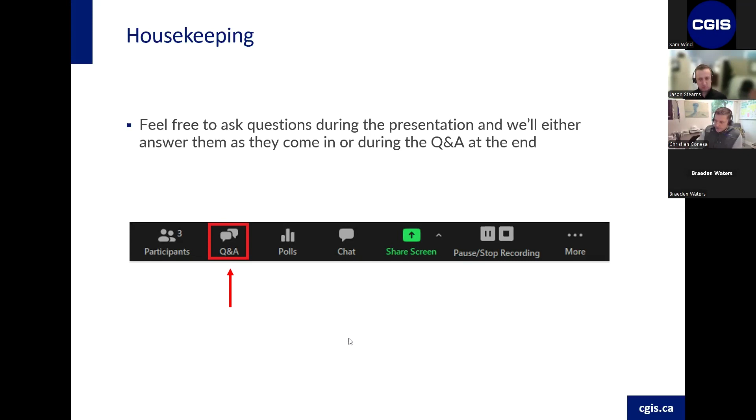The topic of conversation today, from our perspective, as Jason alluded to, is applying lessons from aerospace applications. In this case, we're going to tilt it towards hydrogen, but there are some lessons we've learned dealing with what are ultimately extremely difficult applications in the aerospace industry, bringing those same lessons learned into industry at large, particularly relevant now that hydrogen is so prevalent and growing.

Just a short bit about Trimteck. We're 20 years old, as Jason mentioned, around since 2004. We're a privately held manufacturer of control valves, specifically in the special service and severe service space. We're a bit of a throwback as an organization. Most of what we do involves an intense sizing and specification process around a specific set of process conditions, and the valve is a solution as a result of that.

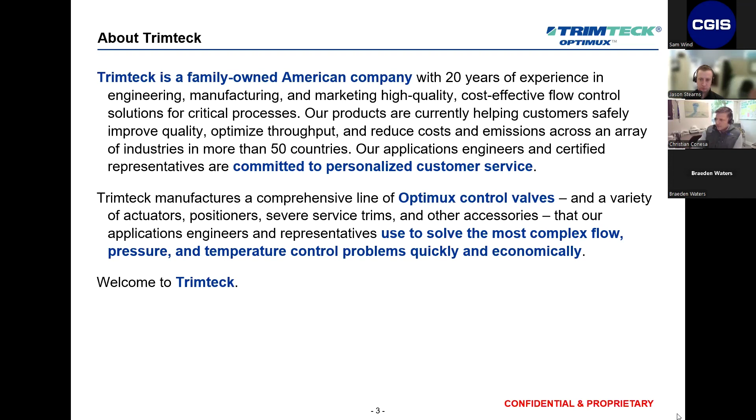All right, so a little lag here. Quickly again, in the value proposition, we pride ourselves on products of extraordinarily high quality. The company really cut its teeth on government contracting in the defense and aerospace sector in the United States, building valves that were unique for ground testing systems at NASA's Stennis Space Center in Mississippi. That quality process that was baked into the organization at that point in time now carries through for every valve we manufacture. Very quick deliveries, also a point of pride for us. We have a very efficient and quick manufacturing process. Responsiveness to the customer and application support, those are two things that go hand in hand. The valves are manufactured in the United States, and they're cost effective for what they are.

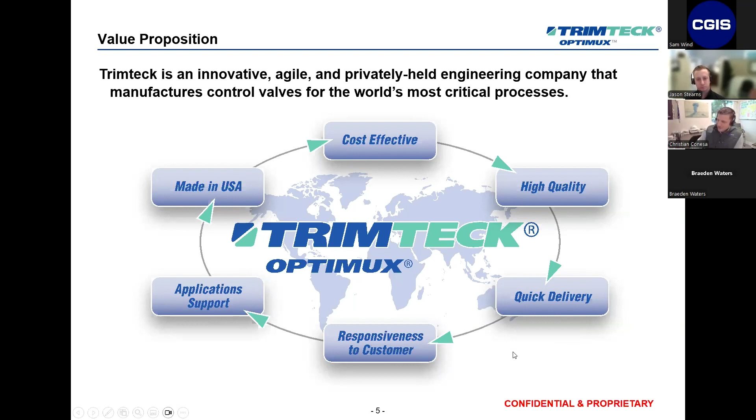Some of our customers, I think, that are most relevant here to this presentation. NASA is really our cornerstone customer, almost our original customer for custom engineered valves. Subsequently, as a result of the private aerospace boom in the United States, we've been fortunate enough to have customers like Blue Origin, SpaceX, Relativity Space, the Air Force, et cetera. But also other non-aerospace customers that are relevant in some way, some of them in the power industry. So we do a lot of work with NextEra Energy, which is the second largest utility in North America, and then the industrial gas manufacturers, Air Products, Air Liquide, Linde, et cetera.

The presentation breaks out into three different sections. The first is, what do we mean by aerospace industry valves? I want to disambiguate what we do versus what companies that make some of these space-bound solenoid valves do. Secondly, we're going to talk about how we engineer those solutions and what lessons we've learned from working in that field.

Then third, we'll go over some of our general service product line or more standard product line and point out some of the design differentiation that we've built into the product, specific to hydrogen in this case, that we have and really are unique in that sense in terms of the market landscape.

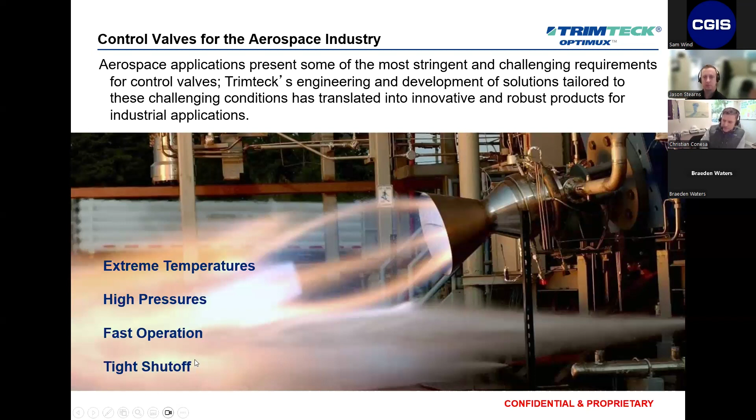Very briefly, I want to show this video. Hopefully it'll play. It doesn't... let's see... okay. Well, that's our first little technical glitch.

This is a Blue Origin test site. So this is what these sites look like—typically out in the middle of nowhere, either in the desert or in the swamp. These structures essentially mimic the throttling of the oxidant and the fuel into the rocket engine, and that has to be done very precisely in order to capture the testing data they're trying to capture from the engine. So that's what I mean when we're talking about ground testing of rocket engines.

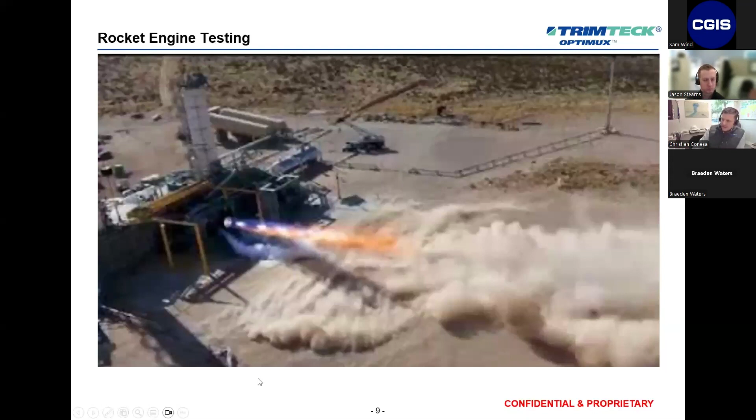One of the things that we really emphasize is that any kind of conversation around control valves—this isn't an introductory presentation on control valves—really has to be specific to the industry we're speaking to, because you guys have different names and a different vocabulary for the applications that you tackle than a different vertical market would.

In oil and gas, you have a certain set of common control valve applications—refining, chemical, petrochemical, and so on. We're talking specifically today about aerospace, which, as I said, means high pressure, low pressure, liquid and gaseous oxygen, hydrogen, vacuum jacketed valves, etc.

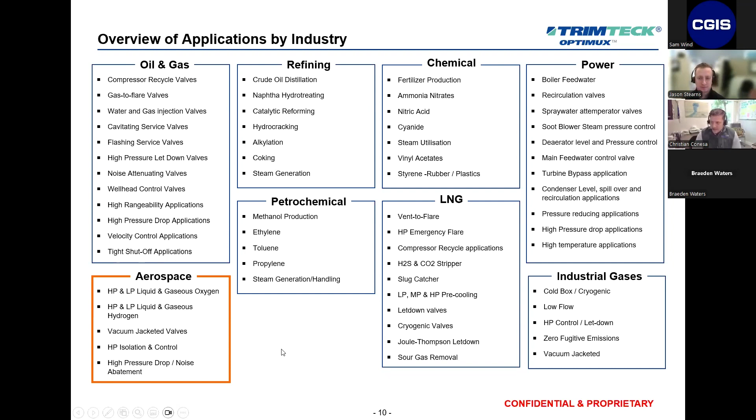The way in which valves are classified—valve purists, and I think CGIS is certainly part of this cohort—people who know valves well understand that there are three categories that have been established over the course of the last 80 years, and reviewed periodically.

When you classify valves according to service, we talk about general service valves being in the lower ANSI class ratings of 150 to 600 class, and moderate temperatures between -50 and 650 degrees F. You want non-corrosive fluids, minimal pressure drops, no cavitation or flashing present. Typically, velocities are low enough in a general service application that noise is not an issue either. Standard materials of construction—carbon or stainless steel bodies—these are your commonplace valves that are interchangeable and common to a wide variety of applications.

Special service is an interesting sort of in-between bucket, and we designate special service valves as valves that have higher pressures, so above that 600 class, demanding temperatures either higher than 650 or lower than -50, corrosive or erosive media challenges, and pressure drops that start to become significant—so more than half of P1 typically.

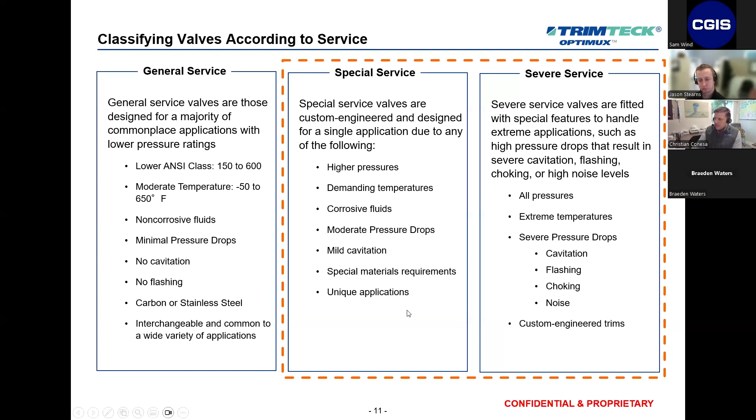When we talk about this, it's the sort of original valve I'm referring to with respect to aerospace testing systems or rocket testing systems that we've built thousands of over the years, but started off with a handful in the late aughts. NASA's issue was they had test stands in the middle of the swamp in Mississippi, that had been there essentially since the Saturn V days - since the space race in the 60s - and been built, I wouldn't say haphazardly, but very quickly, oftentimes using home built or non-standard valving and equipment.

They came to us in 2007-ish with the question of whether we could replace some existing valves they had in there, and they had very awkward face-to-face dimensions. They were built specifically for these stands, and we took opportunity with those orders to study the valves, to improve upon them as much as we could, and we did - in so much as one of their main problems was repeatability.

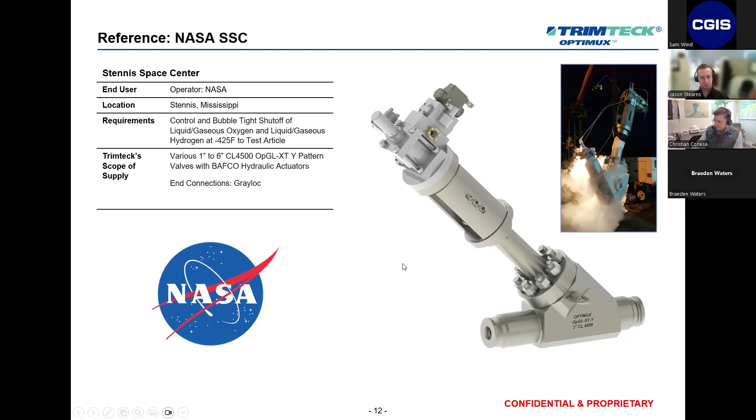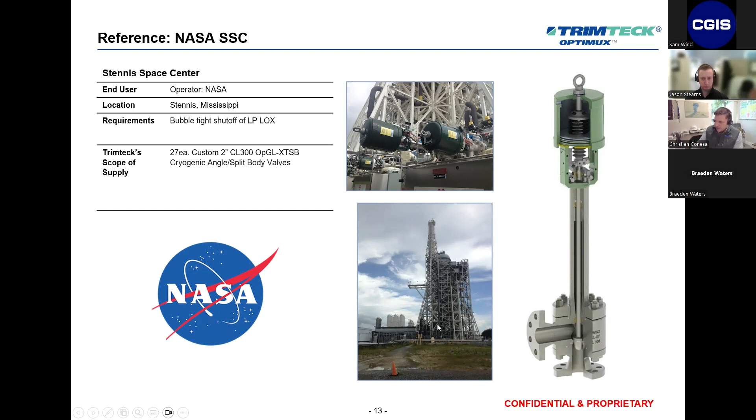It's another example of some liquid oxygen valves on those test stands at Stennis Space Center, and this one is particularly interesting as well. You'll notice this valve is coming out of a cryogenic bath, essentially, during cryogenic testing.

I want to mention something that was a valuable lesson for us during the development of all these different one-off custom valves, and that is the testing requirements. Hydrogen is a notoriously small and slippery molecule, and the test that NASA has devised over the years, in true bureaucratic fashion, they kind of layer - anytime there's an issue, over the course of the last 50 years or however long they've been doing this, instead of getting to root causes, they just add a layer of testing and add a layer of testing. So the test is called the GTO8 test, and it's a bear of a test.

It's very difficult. What you do is dip the valve in a cryogenic bath, ensure it gets down to the required temperature, and then leak test it with gaseous helium at maximum allowable working pressure. The other end comes out to a beaker, and it's a literal bubble test, like you'd have on a standard rubber-seated butterfly valve, but at wild pressures and temperatures—we're talking about 15,000 psi oftentimes. It's got to be truly bubble tight, zero bubbles. That's an extraordinarily difficult test to pass.

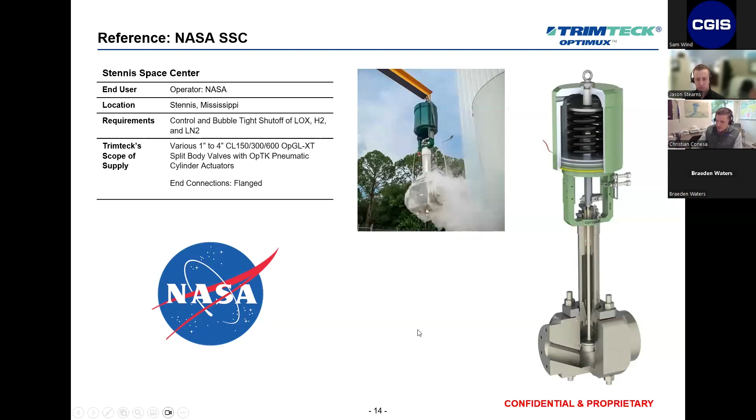Which would contract oftentimes also at a different rate and leave some additional tolerance if it wasn't just right. So, it's a long way to get to your answer, but this is a PCTFE, a KELF soft seat insert here, because for cryogenic purposes, that's the right choice. Let me rip through a couple more of these quickly.

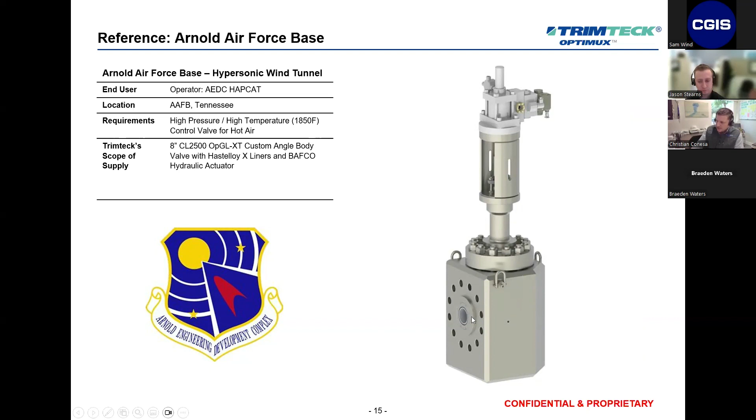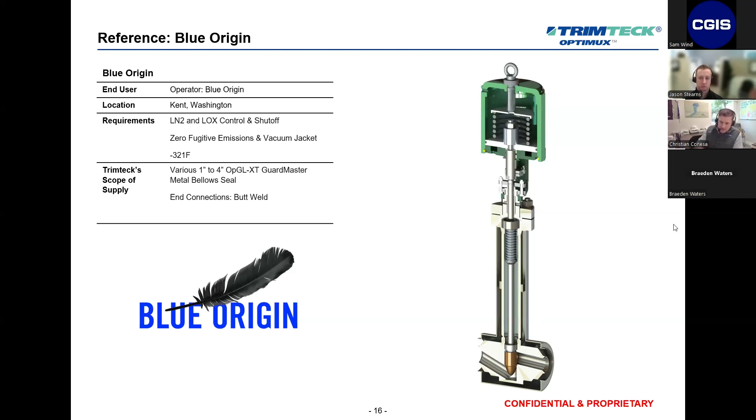Sniff ports here for the metal bellows are super important, whether it's hydrogen or anything else. When you have a metal bellows seal, you want to be able to identify if there's been any breakage or leakage through there. The actuator we'll touch on a little bit later, but the piston cylinder pneumatic actuator or some of the hydraulic actuators you've seen in previous photographs are definitely helpful when it comes to performance of the valve, whether it's the precision in its stroke or the thrust necessary to generate that class 6 shutoff.

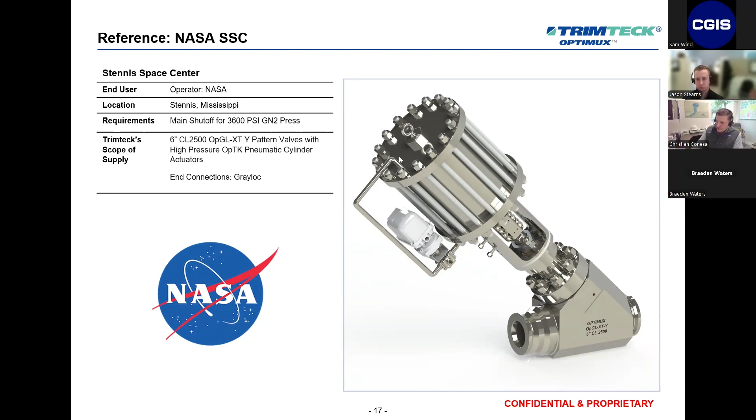So what are some lessons learned and solutions developed as a result of this? First of all, hydrogen's a different animal - let's start there. Trimteck as an organization is very accustomed to dealing with, frankly, weird applications, stuff that's not necessarily in the mainstream of control valve applications. So we found that the muscle we've developed internally around design and engineering, the way that we trace materials, the way that we can simulate applications, bodes very well for the private sector.

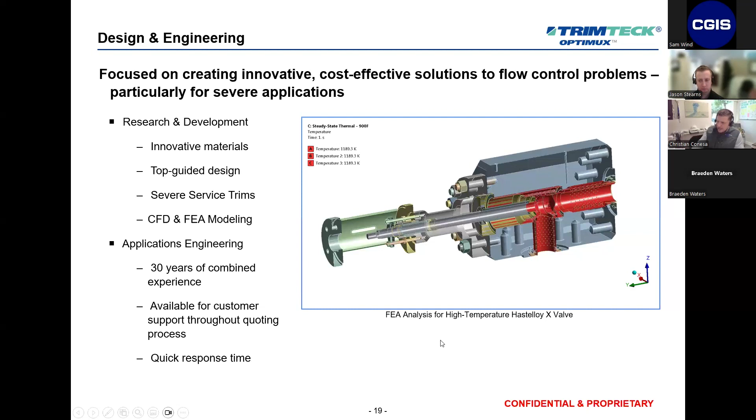We routinely rely on CFD and FEA modeling because a lot of what we do is just one-off work. This is that aperture valve that we showed you up top, and we ran all sorts of simulations for the Air Force. We ran lots of different iterations in terms of design, and also iterations in terms of process conditions, virtually, before we turned a single turn on a CNC machine. This allows us the ability to test before we build - you can see different temperatures here.

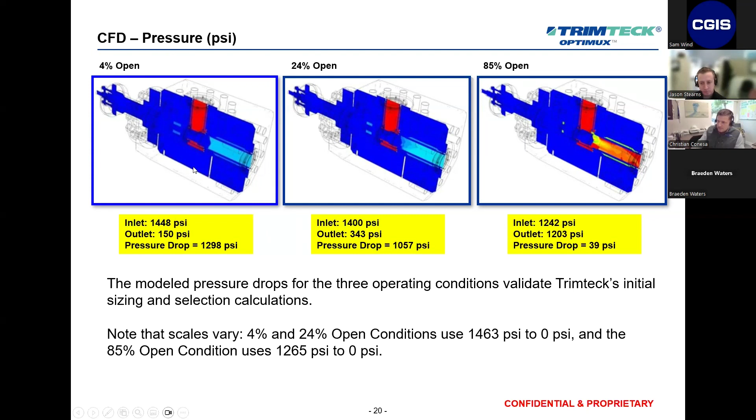Valve velocities become very important, particularly in oxygen and hydrogen applications, understanding what the actual exit velocity, or valve velocity and pipe velocity just downstream are, because these are molecules that don't like to see turbulence and impingement. So you want to make sure velocities are kept to a minimum. This is hot air, so it's not as important, but you get the idea in terms of the visualization.

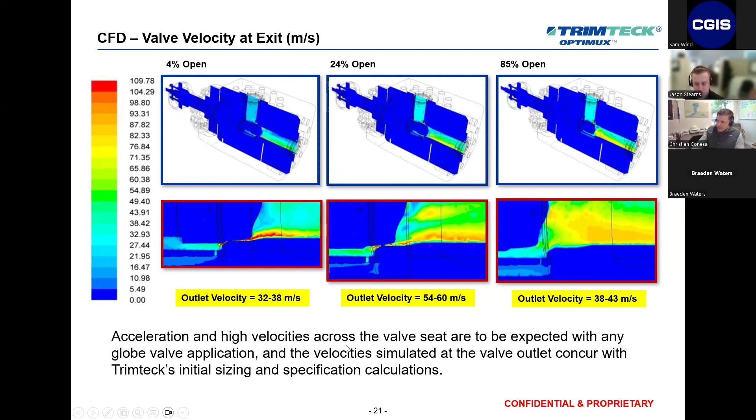And then temperatures, those temperature swings are really important. This is gas flow. So this is the CFD.

The FEA, the finite element analysis, is actually more interesting in a valve like this, because that really allows us to understand where our tolerances need to be at any given point to maintain either shutoff or integrity of the packing arrangement, guiding systems, etc., to ensure that the valve is seating in the exact same spot every single time it strokes, regardless of the temperature.

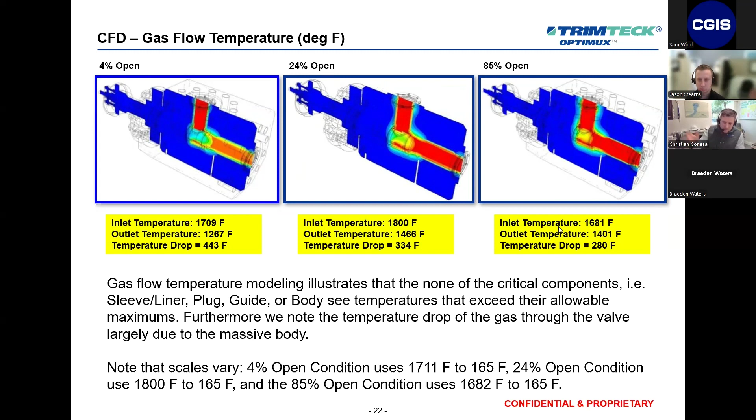This is briefly our applications and design engineering process. We tend to receive process conditions and delivery requirements from a customer. We run it through a sizing and specification exercise. We have a very robust software that we use to size and specify valves.

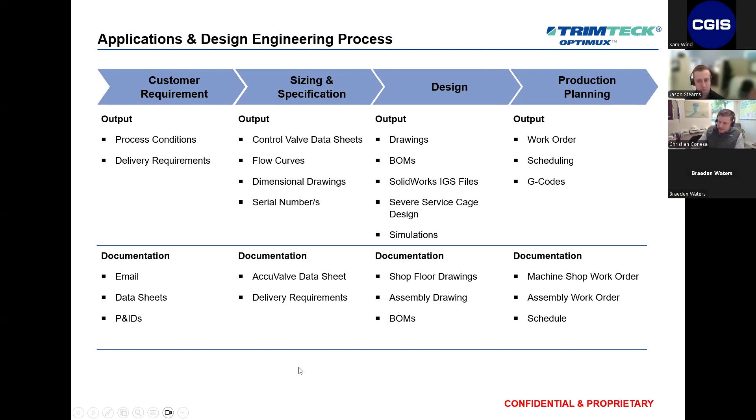If an order comes in, it goes through a design process in SolidWorks, and then in ANSYS if it needs to be simulated. That gets blown out to shop floor drawings and BOMs, and then manufactured right here in Coral Springs. Our supply chain - castings are the only things we don't do here in-house.

We don't have a foundry in-house. We source castings all over the world. Most of the valves that I've shown you here are actually not cast bodies at all, but rather they're fabricated bodies, usually from U.S. bar stock - so North American bar stock. Machining, assembly, testing, all with its subsequent documentation.

The reason I want to show this slide is because that same NASA kind of documentation and QC QA requirement applies to everything that we build, whether we build a 150-pound steam valve or a 45, or a 15,000-pound oxygen valve. That traceability is the same for all those valves.

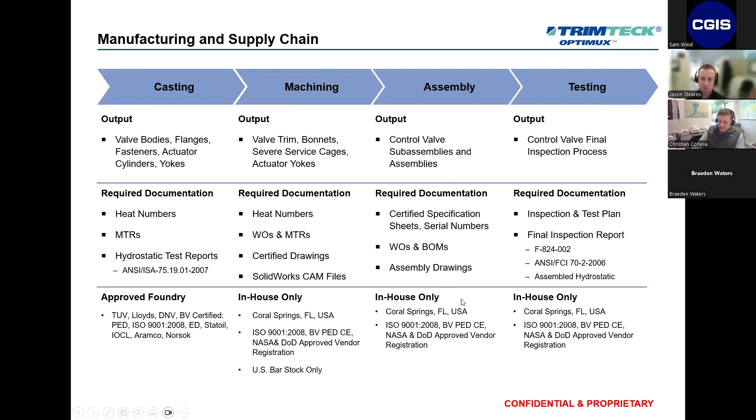All right, so industrial products and applications. I want to be cognizant of time here, Jason, so let me know if I think we're doing decent right now.

This, I think, is a useful cheat sheet that I like to show anytime there's a large group like this. This is just a basic valve style comparison. These happen to be our valves, but this really goes for most any valve manufacturers. What we're doing here is comparing the valve styles based on their ability to handle differential pressures, on their CV size for size, how accurately they control, what's the rangeability or turndown you can achieve with the valve, and how costly they are relative to other valves.

This is a very broad strokes comparison, but I think it's a really useful first pass. I won't go through each one individually, but globe valves - you've only seen globe valves in this presentation because for very difficult applications where you need to introduce exotic alloys, cavitation control trim or noise abatement trim, or you need tight shutoff, the globe control valve is really the pinnacle, and everything else is kind of an iteration of that. They all have their place, they all have their applications, but for what we're talking about, primarily we're talking about globes. I could talk about each of those individually, but we won't do that.

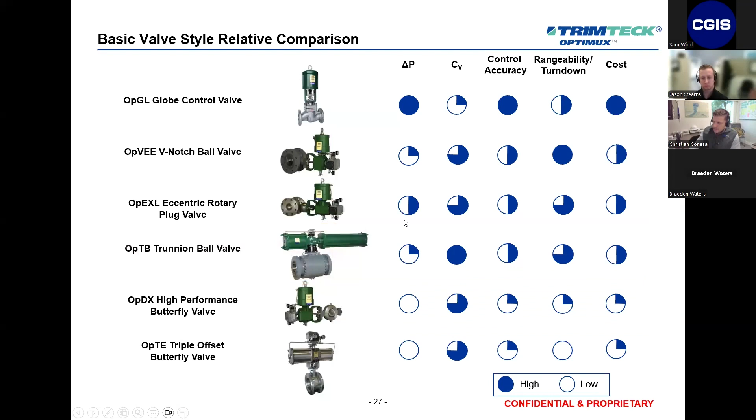Okay, so two industries that very obviously carry over to the private sector from that aerospace expertise are industrial gases, like I mentioned, and LNG.

So the applications that we've tackled in industrial gases go anywhere from the JT valve to cold box applications to low flow, etc. And LNG, similar applications, usually lower pressure classes, but you have some of the traditional sort of gaseous applications, natural gas applications like compressor recycle and anti-surge.

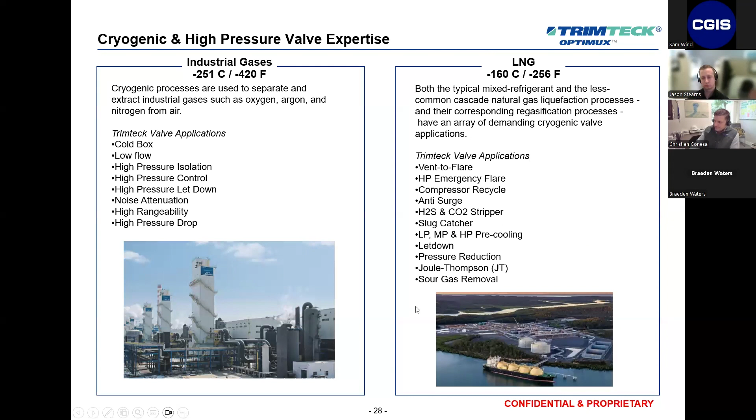The OPGL for us is essentially the flagship product framework around which we work for all of these special and severe service valves.

Right out of the box, this valve has a piston cylinder actuator, which produces extraordinarily high thrust size for size, particularly against diaphragm actuators. That allows us to do a lot of interesting things in the body of the valve, from tight shutoff to being able to characterize the flow with the trim geometry of the plug head, as opposed to the geometry of a cage.

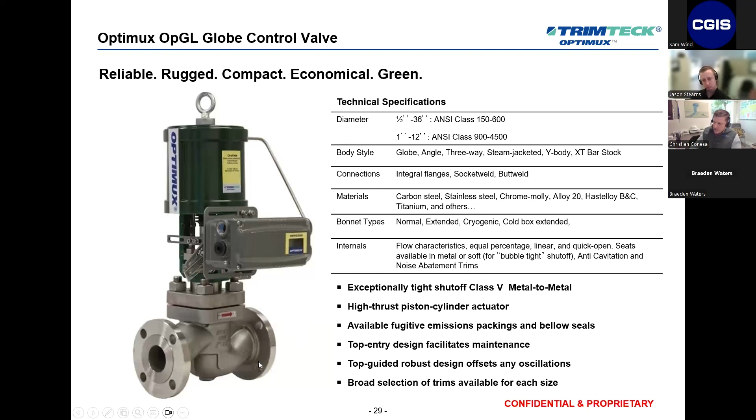We manufacture these in globe style, angle, three-way, etc., with all different sorts of end connections and all different materials.

First and foremost, that piston cylinder actuator, that coffee can actuator that you saw out there, which is our standard pneumatic device, allows you to do a really interesting thing in the body of the valve, which is remove the requirement for balancing in most applications.

The most effective way to control flow is with the geometry between plug head and the seat ring of any valve. As this valve strokes, you get your flow characteristic, whether it's equal percent, linear, quick open, or bilinear.

It allows us to pack the packing box tighter. Because we have additional thrust, we can overcome more friction in the packing box, which gives you better emissions control out of the box.

Again, important for hydrogen as well. Hydrogen specifically, we'll talk here.

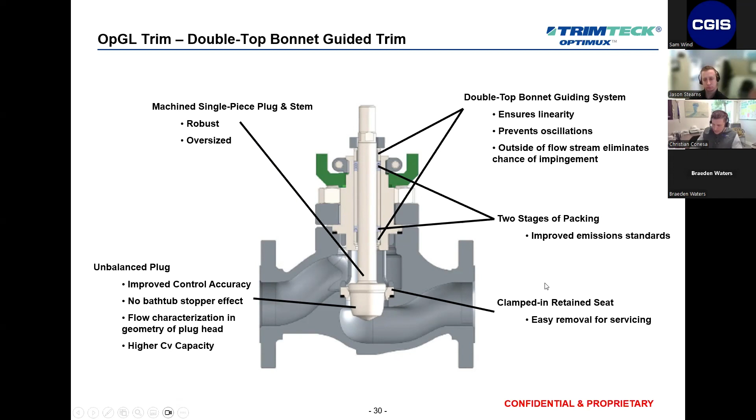We talked briefly about materials and tolerances, material selection, for the temperature swings. That's an important consideration, but really what narrows down the material selection in a hydrogen valve in particular is hydrogen embrittlement, which is presumably you guys know what that is. It's a process that happens to particularly hard substrates.

Typically, the guidance that we use, in particular for gaseous hydrogen applications, is 316 stainless steel with a minimum of 12% nickel content. That's what we like to use. It's soft enough to discourage hydrogen embrittlement, and it's machinable, commonplace, etc. There are other materials that can be used, but primarily when we're talking about bodies, it's 316.

The body configurations can go anywhere from a T-style straight through body valve, or standard flow-through body valve, to Y-pattern valves, to angle body valves, and then what we call the OPGL XT, which is a bar stock body variation of this, and which is a lot of what you've seen in the slides above.

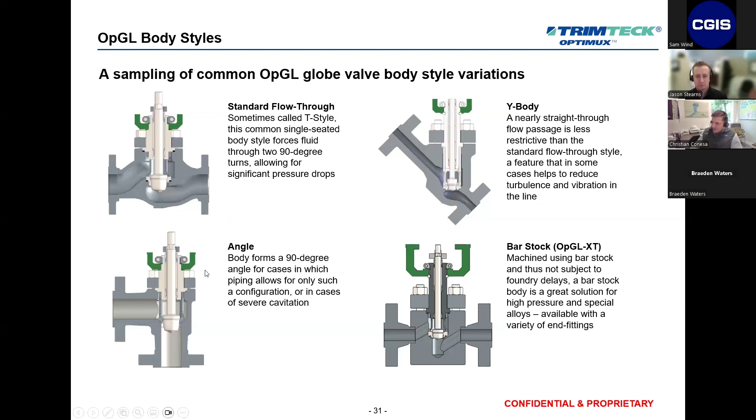Let me move on down. So here's your guiding system. When we talk about guiding the plug stem, we're guiding it in two spots over two thirds of its length: top guide, lower guide, and then packing sets in between.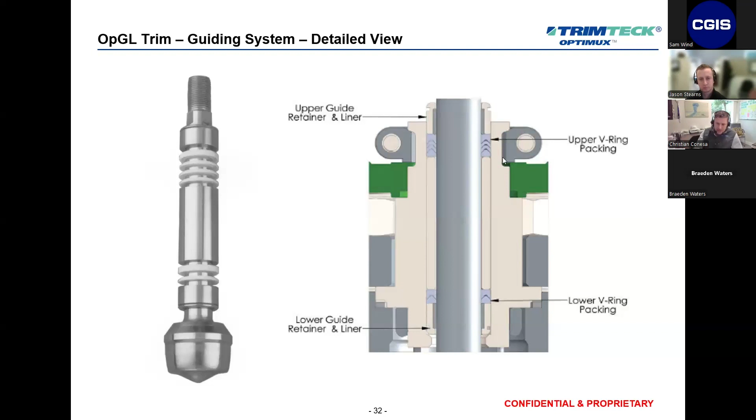Those packing sets - we haven't touched on this yet, but for hydrogen, soft goods material selection is important as well. Selecting the right material for gaskets involves all the standard considerations around temperature and pressure, but also there's a permeability element - hydrogen finds its way through lots of different solids. Typically some kind of reinforced PTFE will be better than virgin PTFE, although virgin PTFE is used also in very high pressure valves. So there's a bit of an art to selecting the proper gasket. We've done everything from spring reinforced PCTFE gaskets and PTFE gaskets to graphite in some cases, standard graphite packing and gaskets.

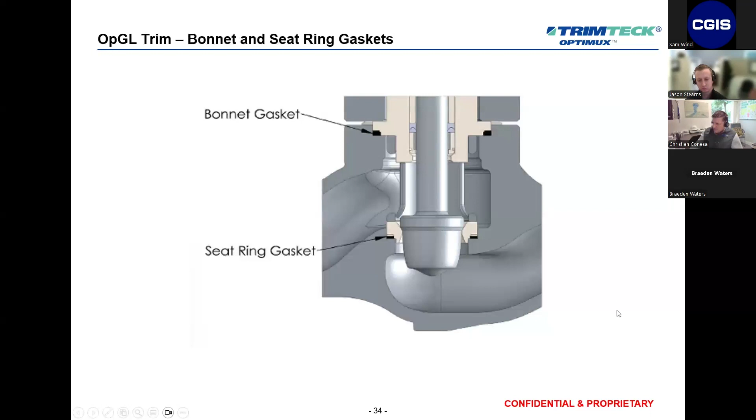I want to point out that one of the most elegant design features of this valve - somebody asked about Fisher - Fisher's valves are typically balanced, which means the plug would have an additional soft component required to slide within the cage. So you're adding an additional point of permeability, an additional leak point, whereas this valve only has two: you can either leak out of the bonnet gasket or leak through the seat ring gasket. The tolerance and compression here has been over the years very tightly calibrated to make sure compression works for negative 423 F and also 100 degrees F. So those temperature swings are super important.

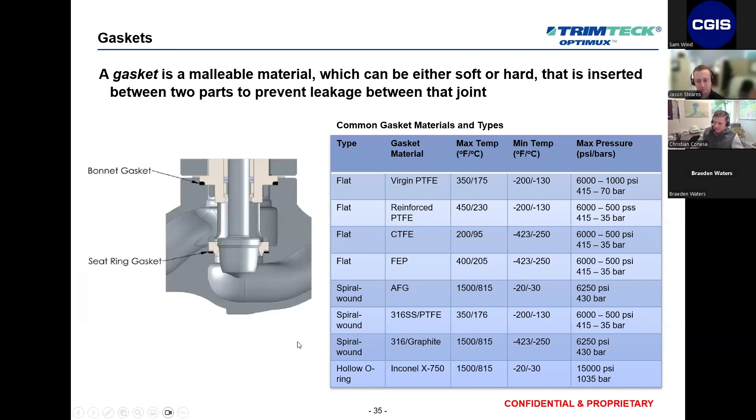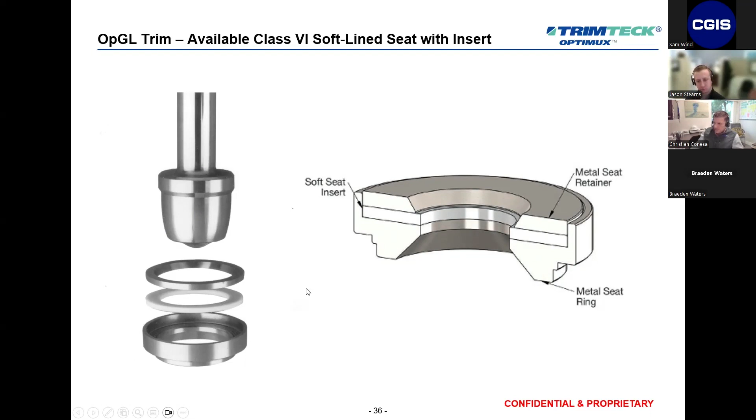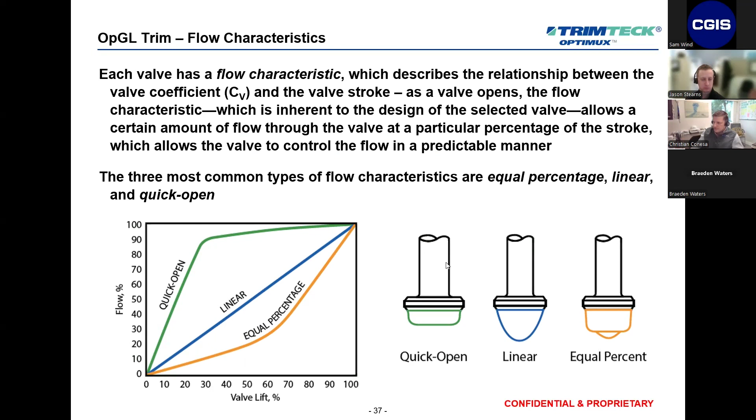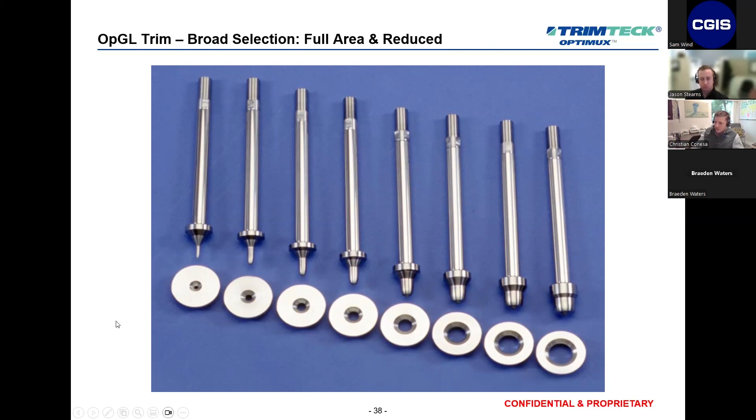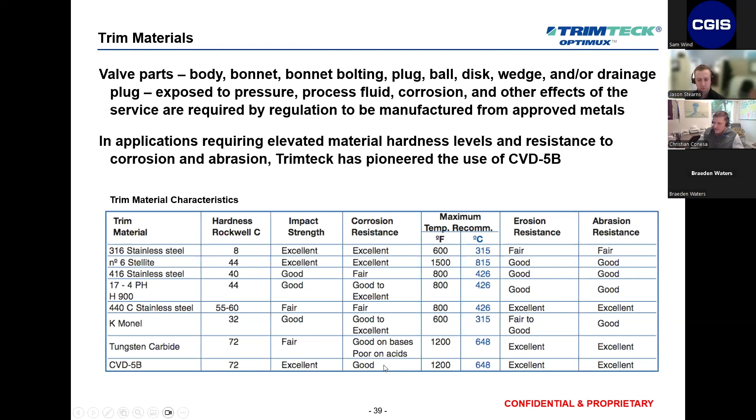I do want to touch on CVD 5B, which is a process we use for hardening against erosive surfaces. It's designed for erosive surfaces - a chemical vapor deposition process using boron.

But in the case of hydrogen, there are companies that have asked us to do this for cost saving purposes. We don't want an all 316 stainless steel facility when you're buying 100 or 1,000 valves. The price difference between a carbon steel body and a stainless steel body can be very significant.

If you apply this chemical vapor deposition process to carbon steel, it increases the resilience against hydrogen embrittlement. This is a really interesting additional layer of protection you can put on a substrate to help prevent hydrogen embrittlement over the course of its lifespan.

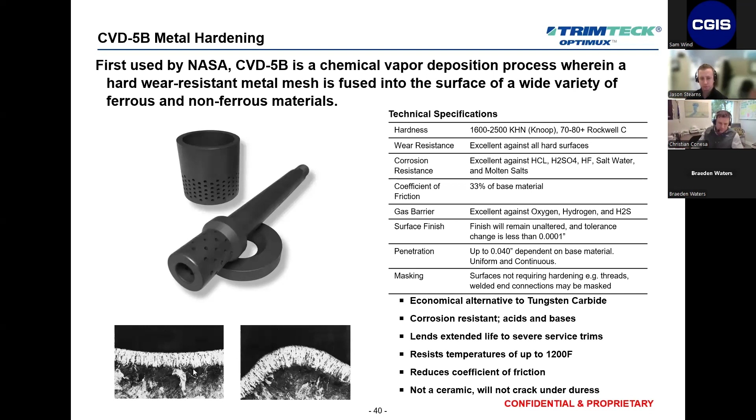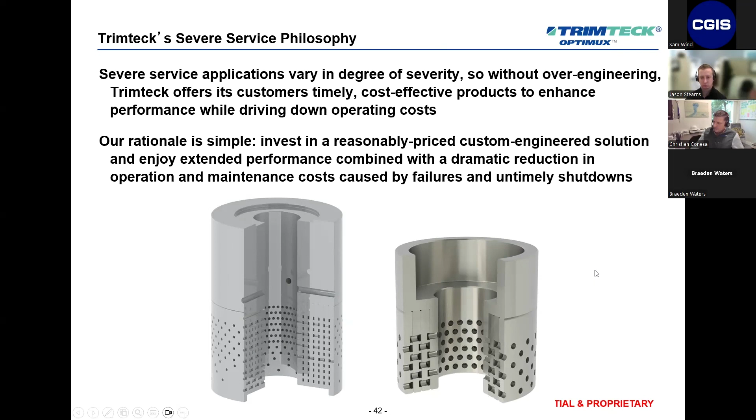Severe service, very briefly: slowing down the velocity is very important, particularly with gases. There are noise abatement tools or cartridges we use that also drag down the velocities going through the valve. In cases of liquid hydrogen, liquid oxygen, or any liquid that's cavitating, there's a similar phenomenon at play, but you're trying to prevent the pressure drop from exceeding or breaking through the liquid vapor pressure, so you stage the pressure drops accordingly.

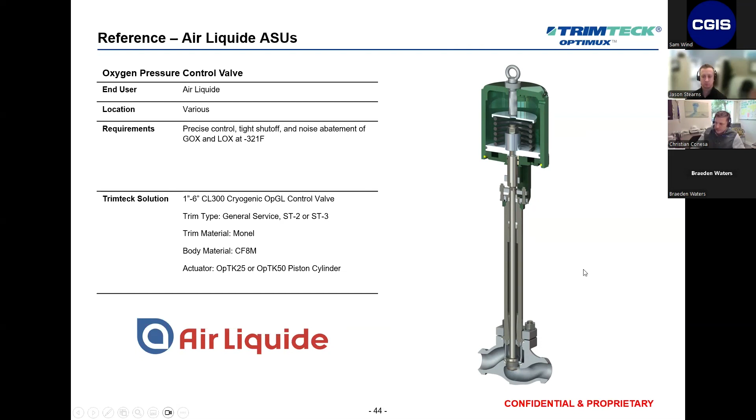There's your piston cylinder actuator. Very quickly, I want to be respectful of time here, and I apologize if I've gone a little longer than anticipated. This is what is now a very run-of-the-mill valve for us, but you can see there's a direct line from the valves we were doing for NASA to this valve for Air Liquide. Mostly this is for oxygen service, both ambient and liquid, but they're looking at hydrogen applications as well, and the valve would be not dissimilar to this. Potentially it would have metal bellows seals and a vacuum jacket as well.

Now this is a good example of a valve that's one for one. We're taking experience from hydrogen service in the aerospace industry and bringing it directly to the private sector, or rather the industrial gases space.

As you guys may be aware, as this hydrogen value chain grows and expands, and people experiment with different downstream applications, the electrolyzer, the green hydrogen piece, is pretty well figured out in terms of material selection, pressure classes, etc. Downstream becomes a little more interesting in terms of what companies are trying to do. In some cases, trying to figure out how you're going to transport bulk high pressure hydrogen gas, and potentially use that to fuel a vehicle fleet or whatever it is you're doing.

At the volume you need to do that effectively and economically, most valving and most piping built for that pressure range, you're talking about 15,000 psi to 20,000 psi in some cases, is very, very small ports. We're very accustomed to a whole industry around 3/8 inch, or tiny ports and tiny instrumentation essentially for these very high pressures.

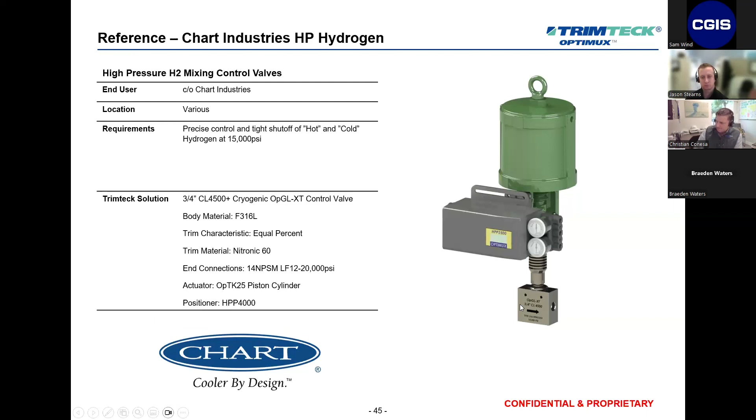Christian, we have a question: any guidance on tolerance selection?

I'm not sure if you need a little bit more context, but I imagine the attendee is asking about tolerance selection within the valve - presumably material and dimensional tolerances within the plug, seating surface, etc. I don't know that there's a rule of thumb. If you're interested, I could potentially put you in touch with one of our design engineers, and maybe he has something to add to that.

I think they're working on some kind of general guidance, with a table of pressure ranges and temperatures, and figuring out where things fall from there. We probably have that internally as a work instruction, but I think that's something to discuss offline. I'm happy to put you guys in touch if that's interesting. I'm sorry that doesn't answer the question, but frankly I don't have the answer, I can get it for you. We'll connect with the individual offline.

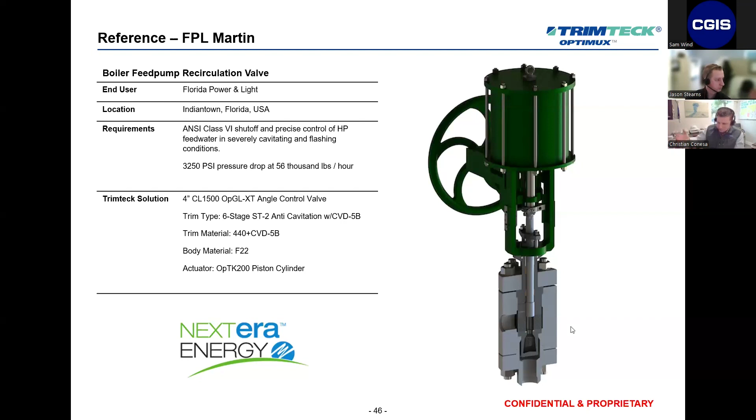Really, we've found it comes down to our approach of understanding very closely what the application is, and then building a solution around that. In this case, it was a very high pressure drop application producing a flashing condition, which was essentially ignored by most of the previous folks who attempted this application. We sort of cracked the code, but it's not magic - my point is, if you put an application through this system, typically the answer will be some solution that's scalable and applicable.

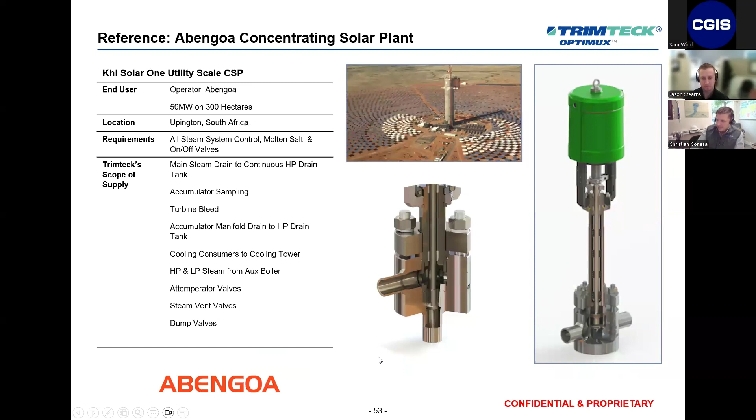Tolerances again - we have the enormous benefit of having this Formula One team in the aerospace industry that's done a lot of trial and error around tolerances at different temperatures and pressures. So we have a lot of expertise in that selection process.

Embrittlement is something to definitely keep in mind, and that informs material selection for both soft and hard components. The rule of thumb we use is 316 stainless steel with a minimum of 12% nickel content. Really, to be called 316 you only need 10%, but the 12% has empirically been found by us and other valve manufacturers to be more resistant to embrittlement.

Soft components as well, equally important. Fugitive emissions, we touched on that, but hydrogen coming off the top of your valve is not a good thing. So your metal bellows seals - the material selection in your metal bellows seal - they have to be hydroformed metal bellows if you have a control valve, not welded, because if you have a control valve in a system like this stroking frequently, the hydroform metal bellows seal will be far longer lasting.